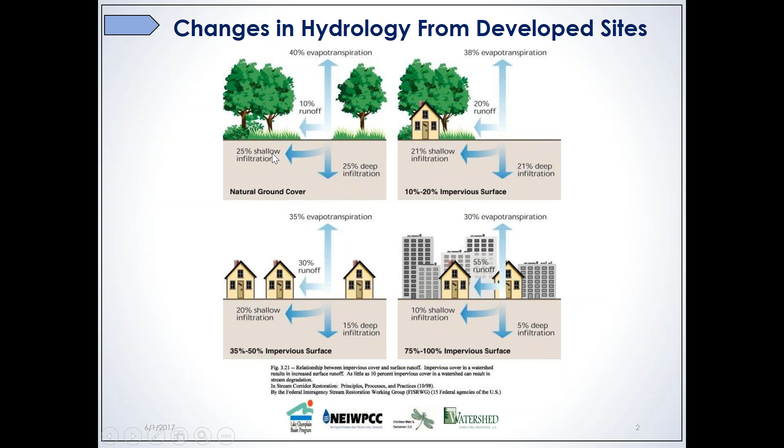The trick that we've always wrestled with in this field is, can we take a landscape like that and make it function hydrologically, probably more realistically like that? It'd be very difficult to get back to that, but that's kind of what we're talking about with green infrastructure.

The manual that we wrote for the Basin Program had an introduction that talked about what is green infrastructure, and here it's a synopsis of that definition. I highlighted a few things in there, of course, in green. The idea is to mimic natural hydrology—can we take a more developed landscape, lots of impervious cover, and make it function hydrologically more like a natural landscape? Pretty tricky, but that's the lofty objective of green infrastructure.

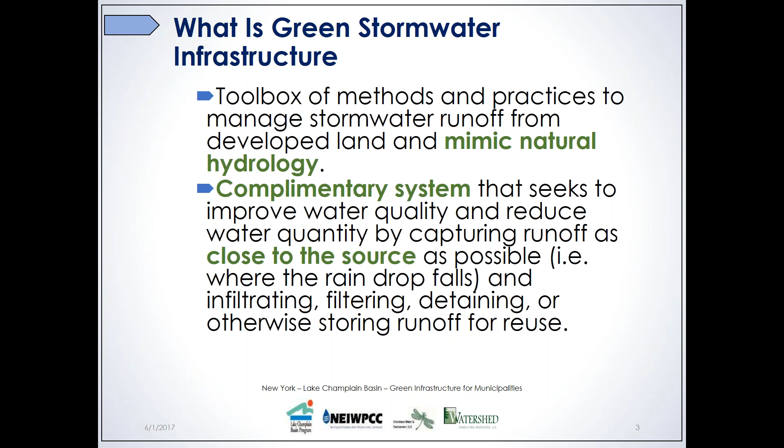And you can see the second bullet down there: it's really not a system that completely replaces what we call the gray infrastructure of curb inlets and pipes, because we realize in cities and villages that system's already in place and it's not going away. Perhaps with something like a new development project where you're starting from scratch with design, you could conceivably go total green. But in the context of this manual, which we'll talk about here in a little bit, we're thinking of it as a complementary system that works with the existing storm sewer system or the gray infrastructure, and that we are retrofitting in other types of green practices closer to the source of runoff. You can see the definition there. So that's kind of what we're talking about with this manual.

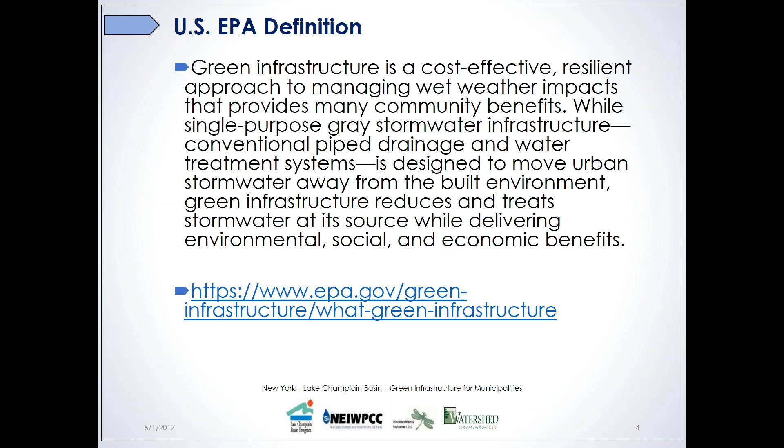This is EPA's definition, which is very similar in terms of working with the gray infrastructure and close to the source. If you're interested in EPA's take on green infrastructure, they have a whole web page you can see the link to. And of course, this webinar will be archived, so you will have access to all these slides as downloadable, I think on YouTube. Is that correct, Matt? Yes, that's right, we're going to post this recording on YouTube. Excellent, excellent, thank you.

That brings us to this concept of stormwater retrofits. So what is a stormwater retrofit? If we are going to put green infrastructure into a village street or a hardscape or a parking lot or a rural road or a building, how are we going to do that? Well, that involves trying to retrofit the existing system. It's putting in a stormwater management practice in a location where stormwater controls did not previously exist or were ineffective.

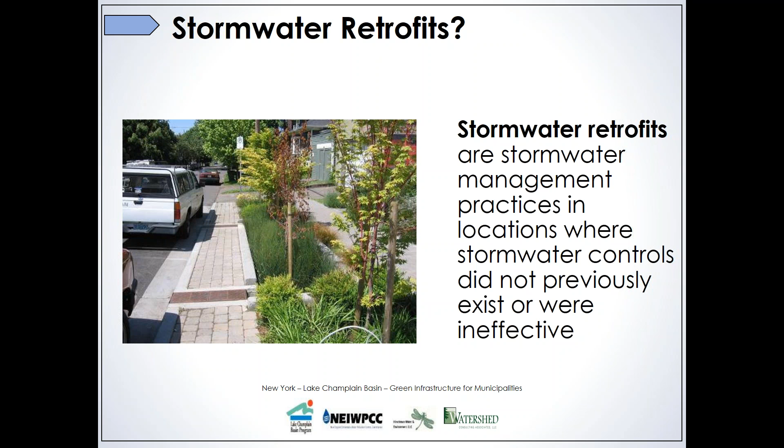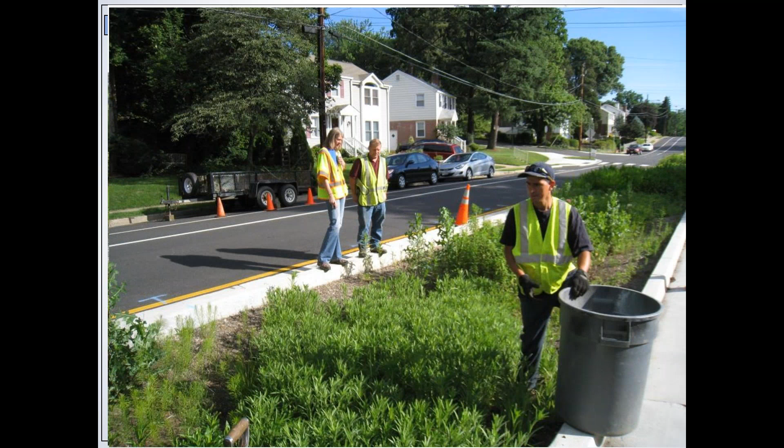This is another type of retrofit in the street system, and you can see here this median just used to be an asphalt median. It used to be impervious cover that contributed to the stormwater problem. So they retrofitted again. It's kind of sunken down with curb cuts so that the water from at least half the travel lane on both sides flows into the system. So that was another example of a retrofit.

And there's many, many different ways to do retrofits. You can use different materials, different plants, different types of structures. So this is an example from West Union, Iowa. The photo is credit of the Conservation Design Forum, which is in the Chicago area.

But this little town in Iowa had a terrible problem with flooding. Even a modest rain would flood the downtown. And they had an issue of redesigning the storm system, just making the pipes bigger. And the cost of that was just tremendous because they had to dig up the streets and put in all these pipes. So they decided to do it with permeable parking. And that really took care of the issue.

So basically they replaced the whole downtown area with permeable parking or permeable pavement. You can see here, and little rain gardens and biofilters also. So that was a retrofit on somewhat of a bigger scale than you usually see, but it worked very well.

Speaking of scale, there's a lot of watershed groups and groups like the Lake Champlain Basin Program and other groups in Vermont that are really promoting retrofits on the small scale, on individual parcels, individual properties, so that every individual lot can start contributing to cleaning up the water.

Here's a few other examples of residential scale retrofits with permeable pavement and rainwater harvesting, rain barrels.

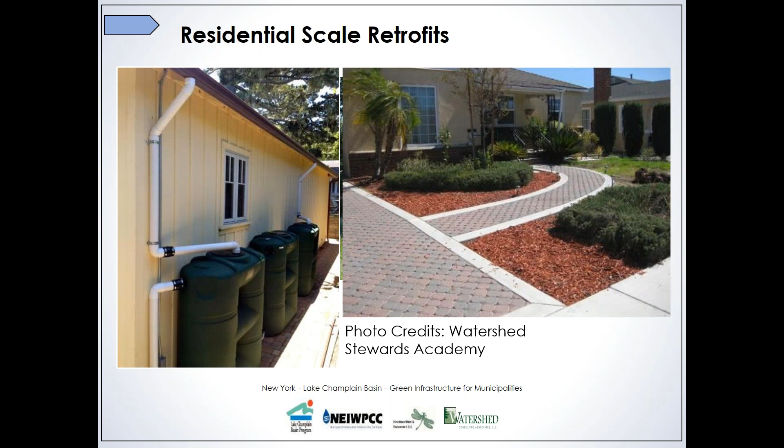So that's the context for the reason this manual came about. And it's targeted towards New York's Lake Champlain Basin. And the reason for that is because Vermont had similar things going on.

So what's the niche for this manual? Why is there yet another stormwater manual out here in the stormwater management world? And doesn't New York already have a stormwater management manual? And the answer to that, of course, is yes. New York DEC has their stormwater design manual.

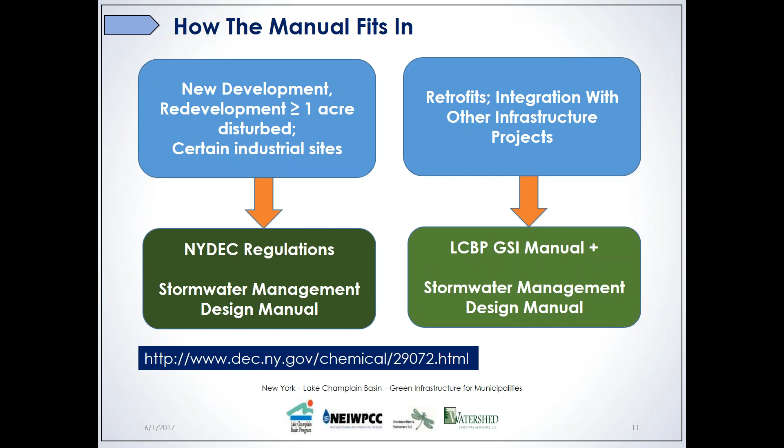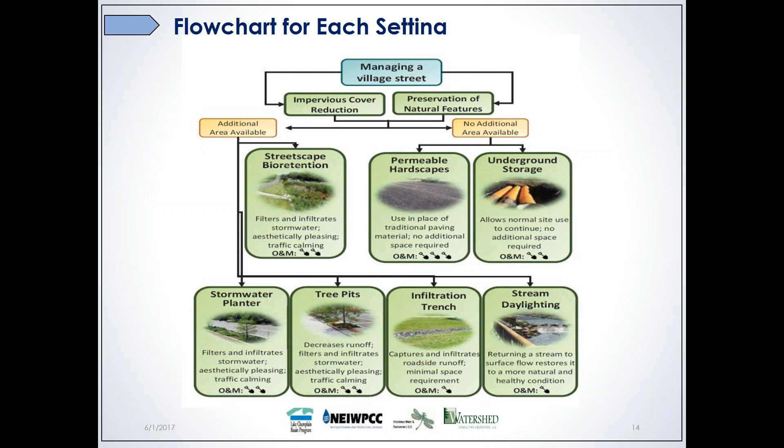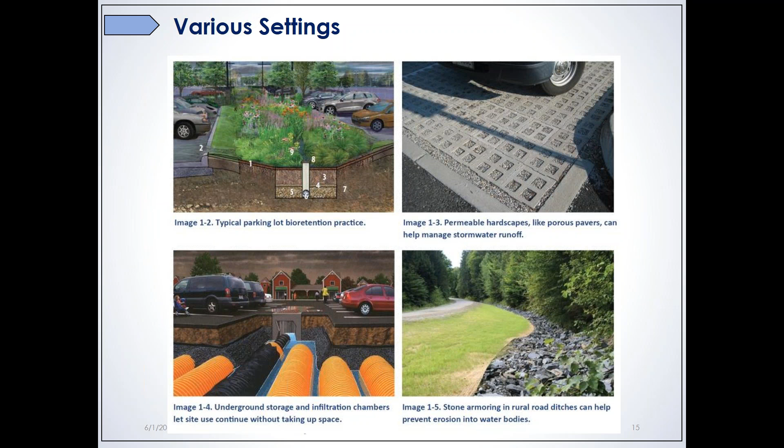Here's just a few examples of these different settings: a parking lot, which is a hardscape, going into bioretention, permeable hardscape here, underground storage for infiltration, and a treatment for a rural road that's causing erosion. So just a quick visual idea of what those 4 categories might look like.

Example, and these are all examples from the manual itself. The manual has an introduction to each of these 4 settings, as well as a bunch of case studies. It's quite impressive how many case studies from New York and Vermont there are in these 4 categories, and the manual breaks it down: what happened, what was there before.

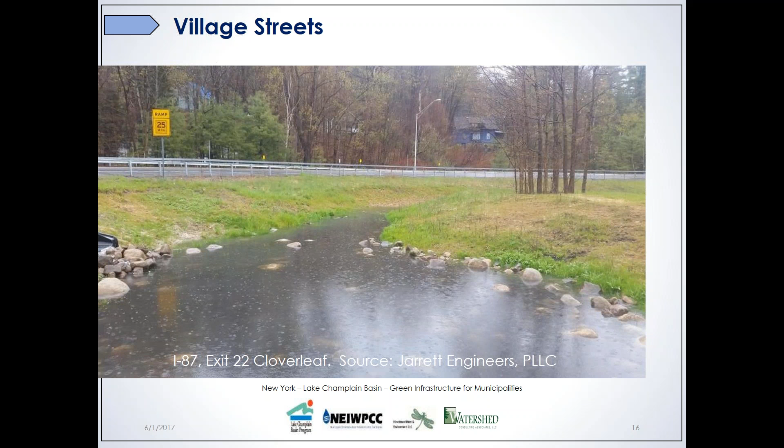This is one example from the Village Streets case study where they had some green space just sitting there next to the road, and that was the retrofit they did. That will probably be presented in the Village Streets webinar coming up June 8th, one week from today. If you're interested in Village Streets and these types of retrofits, and there's a lot more in there, I'd encourage you to download the manual and look at those case studies. You'll hear a bit more about that.

Next week's webinar, as well as all subsequent webinars, will feature guest speakers who have actually designed or managed these types of retrofits in these different settings. Here's another example of a Village Street retrofit, very simple, turning the water out into a dry well. This is from the town of Bolton. If it keeps raining and the dry well fills up, there's an overflow back into the drainage system. So you can see these are at different scales, different levels of sophistication, and we try to cover all that in the manual.

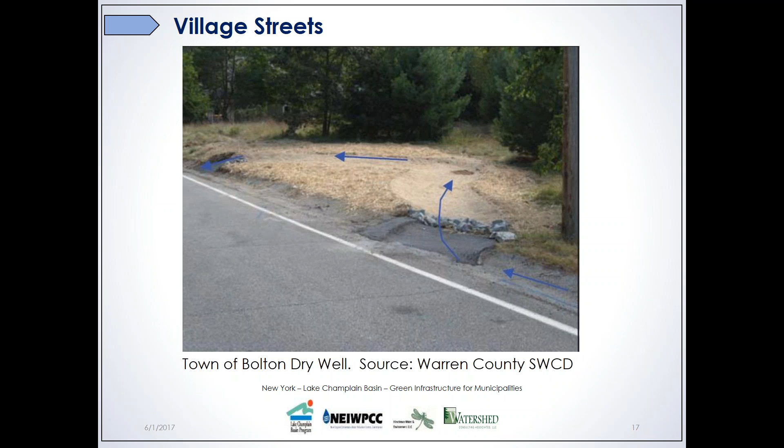That webinar is going to be on June 22nd. I think Dana is going to be leading the charge on that one, and there's more examples of that as well.

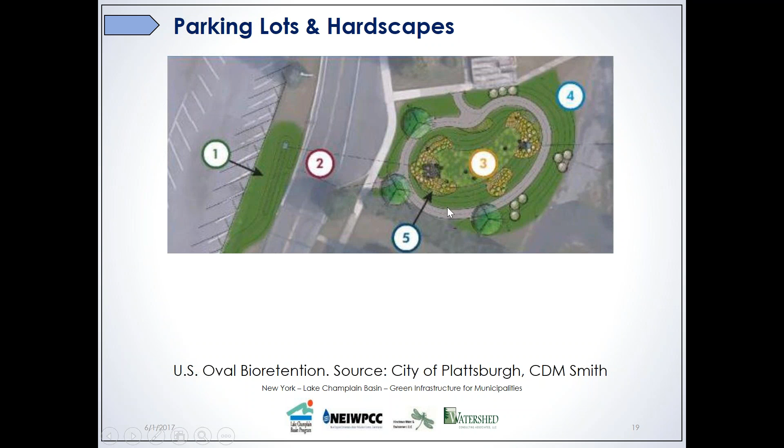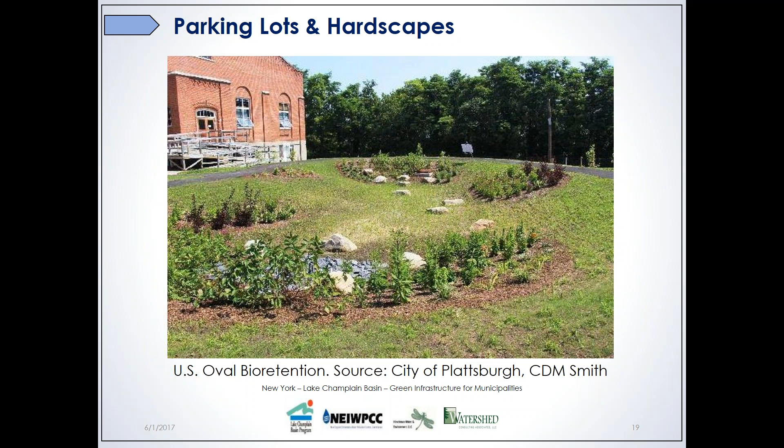The third category, parking lots and hardscapes. This is the U.S. Oval Bioretention Project in Plattsburgh, New York. You can see this parking lot and other areas, travelways of impervious cover. This was a retrofit where they put bioretention in the drainage system. They had the space available, and they're treating the water with that bioretention area. So that's an example of a retrofit for a hardscape parking lot or roadway.

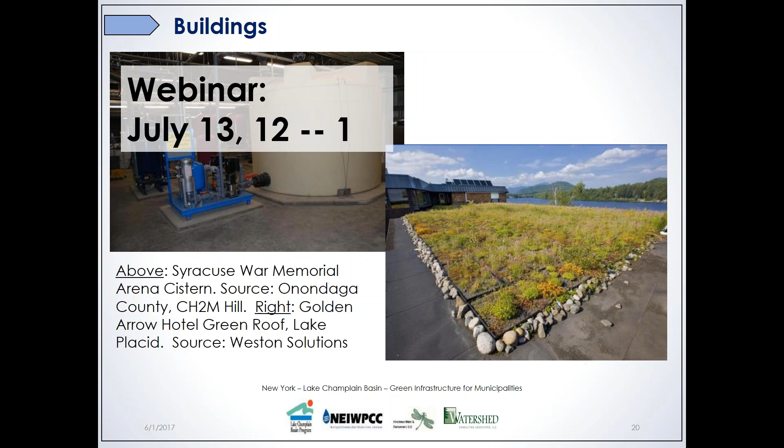This is the idea that we're going to integrate green into gray, integrating green stormwater infrastructure into the existing system in these four categories: buildings, parking and hardscapes, village streets, and rural roads. There's an idea afoot in the world of green infrastructure nationally that we should pursue what's called a dig once strategy.

We have infrastructure already out there—roadways, pipes, ditches, inlets, all the stuff that touches stormwater—and we've got to take care of it. Sometimes it needs to be upgraded, sometimes repaired. So the idea of dig once is: if you're going to touch some piece of infrastructure, put some green into it, something that will filter and treat for water quality. That's the essence of the dig once strategy.

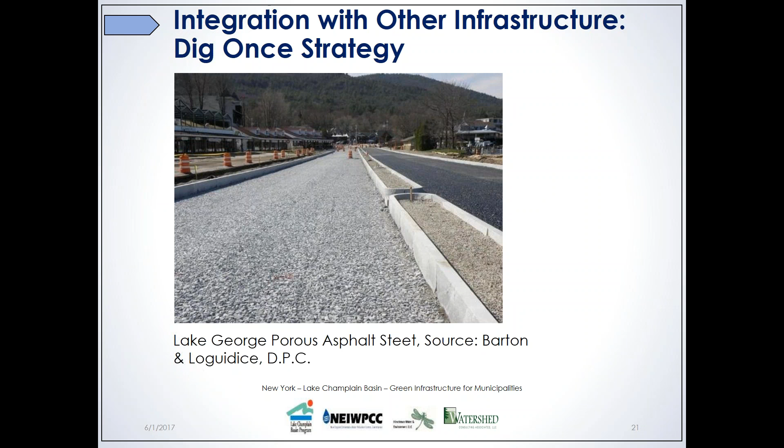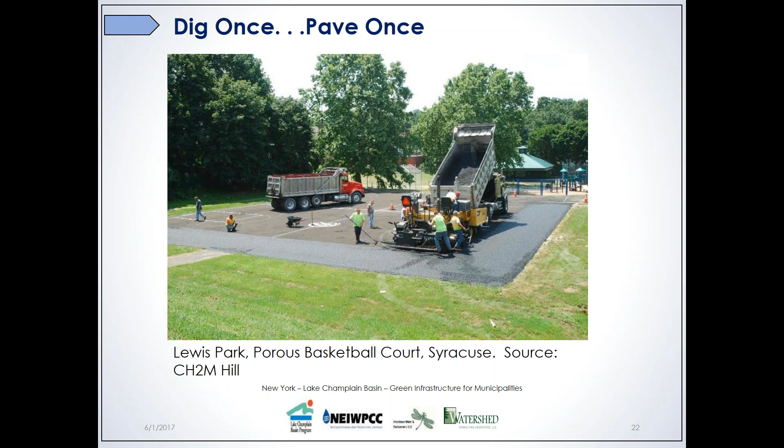This is an example, also shown in the manual, of this Lake George porous asphalt street. They were going to redo the street anyway, and dug a little bit more to make it porous—an example of a dig once effort. This is more of a pave once example from Syracuse, where they had a basketball court, and instead of just repaving it with regular asphalt, they made it a porous basketball court. So that's dig once, pave once.

The idea is basically you've got a procurement process, a lot going on with design, equipment mobilizing to the site, contractors—the goal is to not duplicate where you don't have to. If you can dig once, it has the promise of being cost effective, allowing you to share costs.

The green part might come from a grant or a different pot of funding, but if those things can be combined with your gray funding or O&M funding, then you might save some money, you might save some time, and it's worth pursuing because it might be a streamlined process.

Importantly, if you take on the ethic within a local community that every time you're going to touch a piece of gray, you're going to at least try to consider putting in some green, it probably won't happen 100% of the time, but if you have a process pretty early on where you ask what kind of green might fit into this gray...

Because we're going to be digging up the street, putting an addition on the school, redoing the park, adding to the library, all those different types of settings—if you think about it early enough, it might work out to stick in some green. So those are some of the advantages.

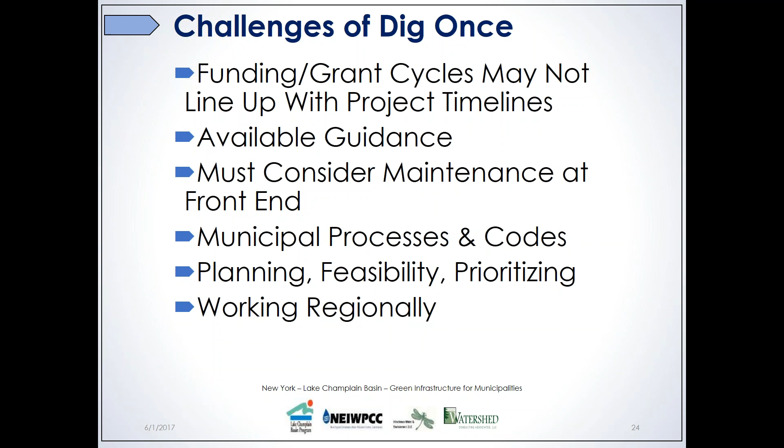That's an upfront step that should be done anytime you're thinking about putting some green infrastructure into the landscape. The idea is that we could work regionally—the Lake Champlain Basin program is a perfect setup for that, perhaps serving as a clearinghouse of lessons learned, ideas, webinars like this, funding for manuals, get-togethers, trainings, and things like that.

A lot of these challenges were articulated down here in the Chesapeake Bay watershed, where I'm a resident. There was a workshop last year—actually earlier this year—and the report was done earlier this year. The workshop brought together people from all over the watershed representing government agencies, design professionals, local government, MS4 people, and funders, in a big brainstorming session on this Dig Once strategy, and some of these challenges I just talked about came out of that.

There's a report, and if anybody's interested I can send it to Matt and the Lake Champlain group, and maybe they could put it on the website. That report goes into quite a bit of detail about the challenges and also some of the ways to address those challenges with this idea of Dig Once.

So that's all to say there's a chapter in the Lake Champlain Green Infrastructure Manual just on this topic of planning and implementation. Chapter 6 touches on a bunch of the stuff I've been talking about—what are the prerequisites for even mounting the effort to put some green infrastructure in your community?

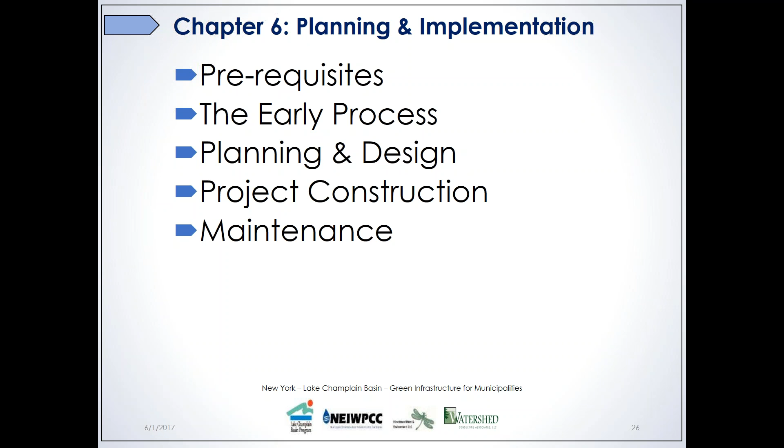What should you consider early on in the process—not at design, not at installation, and certainly not at maintenance, but early on when you're just thinking about the ideas? Key considerations include planning and design, project construction, and maintenance. That Chapter 6 in the manual addresses all those things.

Here's a quiz - people can type their response in the chat box. What's the most important part of stormwater planning? A, the free barbecue at the stakeholder meetings. B, estimating load or volume reductions. C, getting out in the field to identify sources and solutions. D, building implementation support from the beginning. Or E, documenting findings.

That's Dana's got it - I don't know what the equivalent would be in New York. There's probably a kielbasa or something like that. You've got to feed the folks, but I think the real answer is all of the above, though B through E might be a little more important than the barbecue. Yep, got the maple - of course, maple.

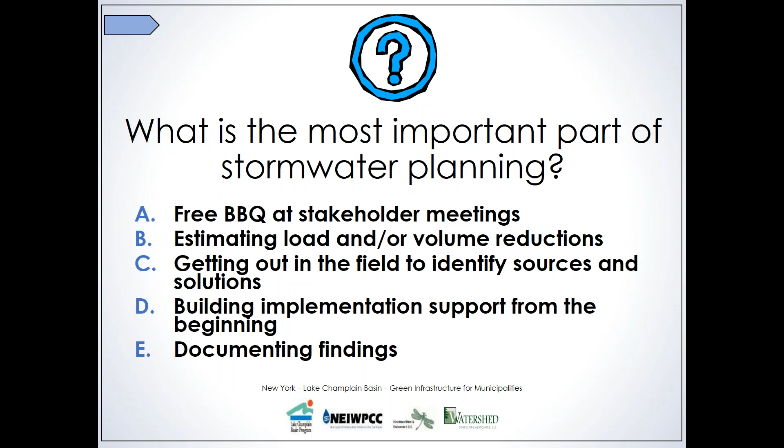Here's a couple visual examples of the barriers or challenges in the process of integrating green infrastructure. As you can see, we all have codes - every village, town, and city has some code that talks about street width and whether you need curb and gutter. These codes can make green infrastructure hard to do. If you have to have curb and gutter, or a 36 or 50 foot wide right of way, those are impediments that should be identified through a planning process, and maybe a structured process to remove them from local codes.

My former employer, the Center for Watershed Protection, has a tried and true method called better site design and local roundtables, which have done just that. I think the CWP webpage has tons of material on the better site design process.

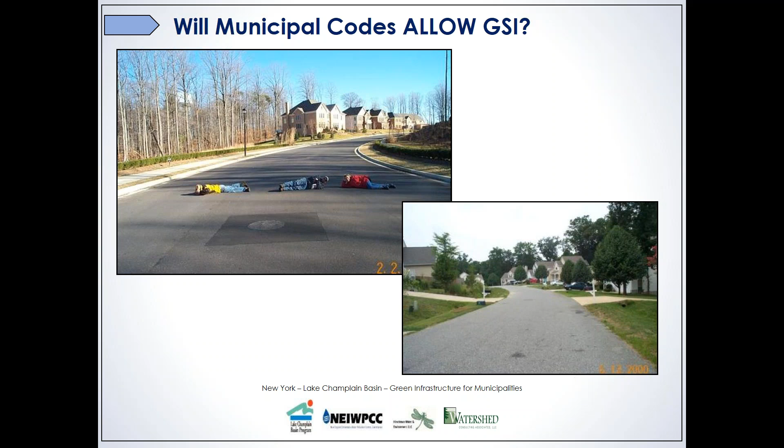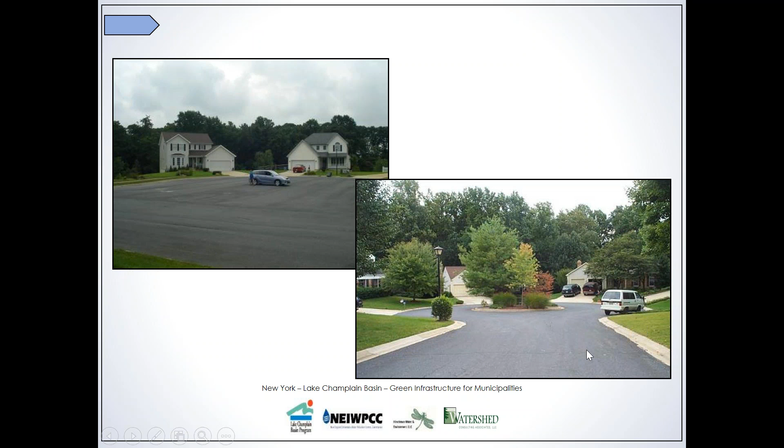Here's another example - a cul-de-sac. Obviously up here you've got a huge cul-de-sac - basically a lot of this may be driven by needing to pull in 3 fire trucks at once, if every house in the cul-de-sac were on fire at the same time. But as you can see, other solutions might be possible where you can put some green in. So that might be a code issue at any local government.

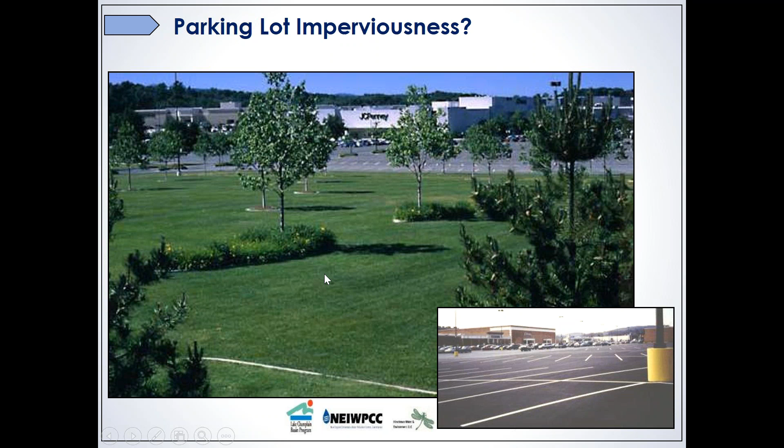Parking lot imperviousness - this shows overflow parking on reinforced grass, one of those products with rings or a superstructure that allows people to park on it. This kind of parking lot is designed for something like Christmas Eve overflow, and it could be green, but it has to be allowed in the code. So that's kind of what we're talking about.

Identify and prioritize your projects and promote the co-benefits. In that Chesapeake Bay workshop I referred to, we talked a lot about co-benefits. For this reason, if you're an elected official, a citizen, a business, or a civic organization, talking about infrastructure or green stormwater management can be an eye-glazing entry into why the community should undertake anything.

It's pretty technocratic, but people like their clean drinking water. They may be very concerned about drainage or flooding issues in their neighborhood. They might be concerned about whether there are enough trees, whether the community is healthy, whether people are out walking, whether there are paths along creeks, recreation opportunities, green jobs and economic development, or a way to invest in challenged neighborhoods, et cetera.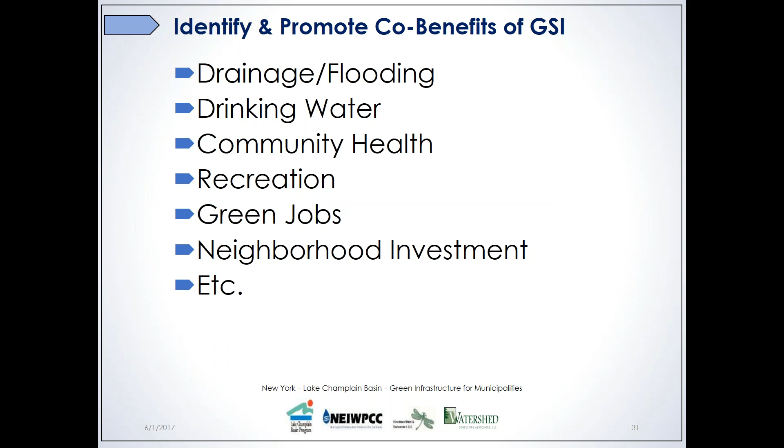So whenever you're talking about green stormwater infrastructure, don't lead off just talking about GSI this and GSI that. You want to see what's really of importance to people in that community and weave green infrastructure in, because it has benefits in all these different categories. It's really about messaging.

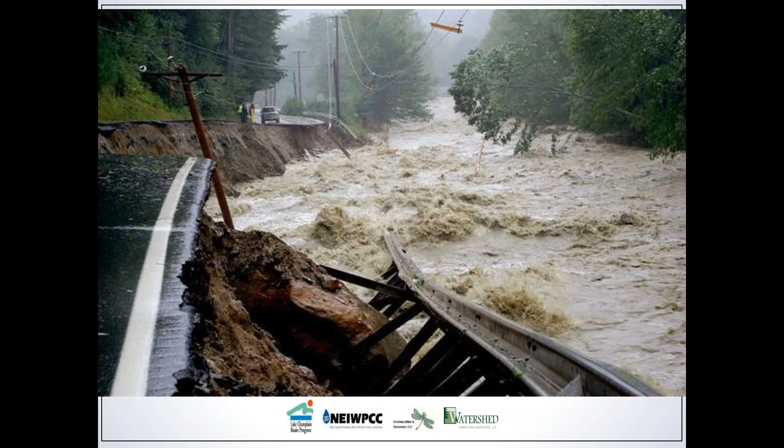Here are a few examples of recreation, fisheries, and people losing land to erosion. Obviously, green stormwater infrastructure or any type of infrastructure isn't going to do much in this type of flooding situation. But there is evidence that over long periods of time, if you do enough green, you can reduce at least a nuisance level of flooding.

We had a slide on the importance of prioritizing, and that can't be stressed enough. People can go in the field and say, let's stick something here, let's stick something there - that seems like a good idea, and we'll just green the world - and that might be $7 million later. You can't do it all, you can't do every project that seems like a good idea. So there has to be a systematic way to score, rank, and prioritize your projects, and you might pick different ways to do that. This is just an example.

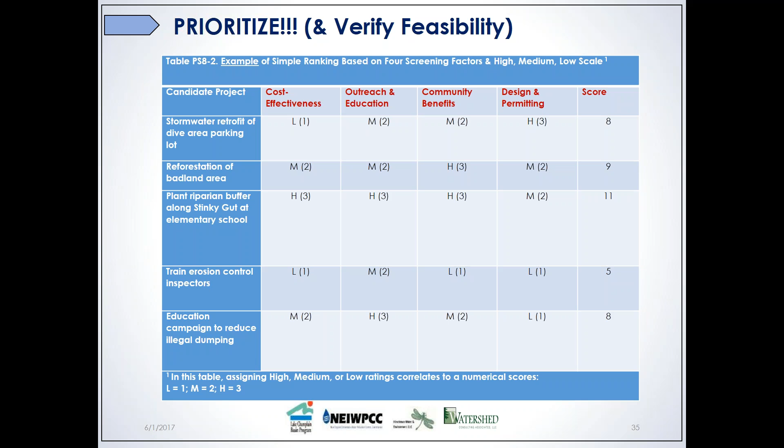The point is, look at your suite of projects that you've identified through some type of inventory process in your community, score, rank, and prioritize them, and check in with the community and stakeholders about what they consider to be priority projects. That is worth doing. Unfortunately, it's a process—it takes time, staff, and resources. There are many examples across the country where green infrastructure projects skipped this early step and had problems later on. That's why we're stressing the importance of this process.

Everybody wants to know about cost. We have all these great ideas of green infrastructure—how much is it going to cost? Is it cost effective? Information is available out there on the websites of many different organizations, including Center for Watershed Protection, WEF and WERF, and state agencies. It's really hard to pin down costs.

The idea is at the planning stage, you're probably going to use literature values, some of these existing resources for the different costs and cost effectiveness. This is one that Center for Watershed Protection did fairly recently for the city of Richmond, in Virginia—total nitrogen cost effectiveness, total phosphorus, total suspended solids—and you can see it looks at a lot of different types of projects.

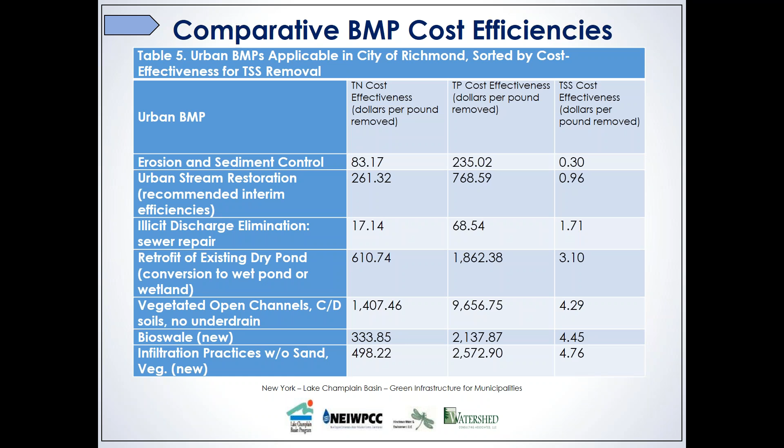So literature values are available. I wouldn't rely on these when you actually get to your design process because there are so many variables when you get to the project-specific technicalities that the cost really has to be looked at. You have to sharpen the pencil at that stage. But cost is always going to be the first thing that the city councilor, council person, or public works director is going to ask about.

Now, we want to put numbers on everything. This is a great quote from Albert Einstein: not everything that can be counted counts, and not everything that counts can be counted. It's really hard to quantify the benefits of a pet waste program or a riparian restoration if we're trying to bring everything down to dollars per pound of nitrogen reduced, or an illicit discharge program, or education.

Cost is important, but you have to put it in context, and that's why these other screening factors—like community benefits and opportunities for education and outreach—are good to throw into your ranking and prioritization, so you can fold in these other types of projects and not have them discarded just because they're hard to quantify.

Another planning step, very important: the work up front with utilities—dry utilities as well as wet utilities—and feasibility. A lot of things can be put on paper, but unless you know that they are feasible—are the soils adequate, has the geotechnical work been done, what about existing trees, tree canopy, root zones, can the project be accessed by equipment—that might have to do with traffic control.

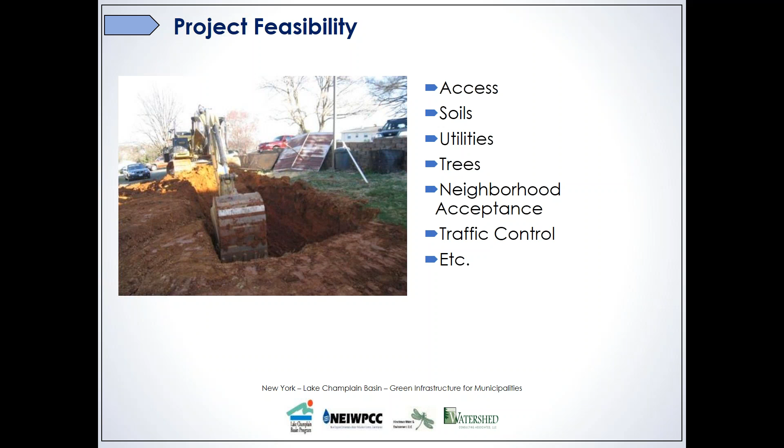Again, the lesson from across the country: it's easy to skip this because it takes time and extra money, but it has led to problems down the road. So just to give you some sense of what's been important in other places.

Finally, maintenance—how can we forget about that? Whenever a project is even conceived, you have to ask who's responsible, who's going to maintain it. Do they have adequate training, or in some cases certification? Do they have the adequate tools to maintain it? Is there access? What would be the frequency? If there's vegetation, how's that supposed to be maintained?

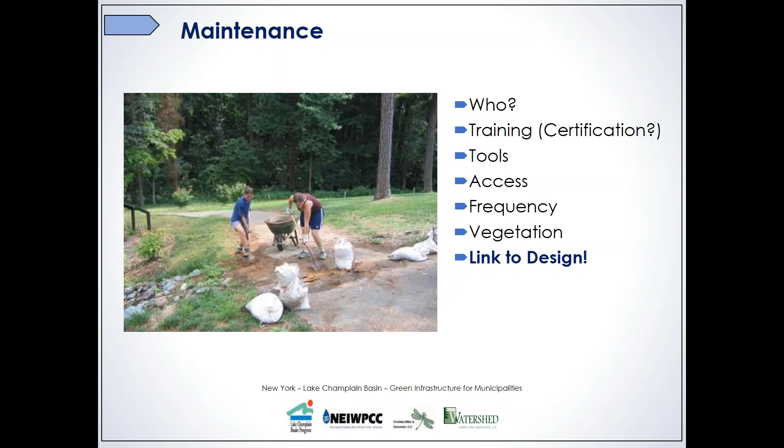Very importantly, can we modify the design to reduce the long-term maintenance burden or maintenance liability of a practice? One of the things I do down here in the Chesapeake Bay is teach a certification class for landscape professionals called the Chesapeake Bay Landscape Professional Certification, and we talk a lot about this link between design and long-term maintenance responsibility. So there are people around the country thinking about it.

I think Seattle, Pacific Northwest, some places in the Southeast and the Midwest, and obviously up in your neck of the woods too, in New York and Vermont.

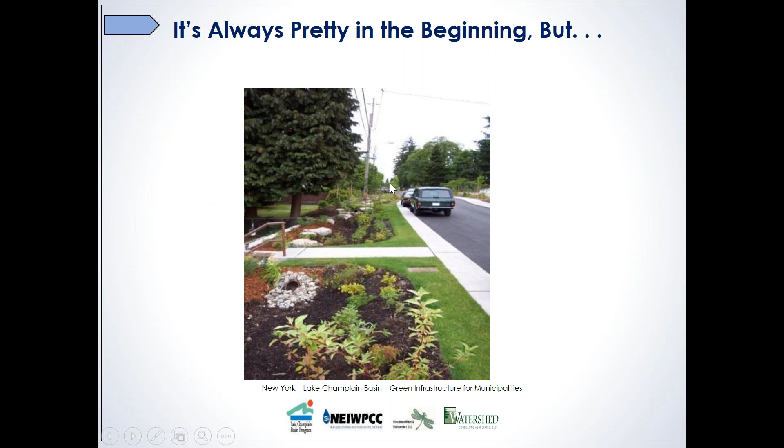The idea with vegetated practices, the internet is full of beautiful pictures. They're usually taken right after a practice is installed and the landscaping goes in, and it looks kind of neat and orderly, with these nice mowed edges. Over time, these things become jungles and thickets, and people start scratching their heads, thinking, I didn't know this thing even had to be maintained, and now I have no idea how to maintain it. So that's the situation we want to avoid by asking all the right questions during the design process.

Here's one in the right-of-way. If this turned into a thicket, we'd have sight distance issues, safety issues, neighborhood acceptance issues. So you can't put in something like this without a maintenance plan, obviously, since it's in such a public place with traffic flow, just by way of example.

Good news for you, New York folks. Your Department of Environmental Conservation has just released this maintenance guidance. This is a chapter in the state stormwater design manual, and it just came out on March 31st. I worked on this project when I was with the Center for Watershed Protection with some colleagues there, including Laurel Williamson and Deb Caraco, who's in the Ithaca area. This maintenance guide is interesting — it's a different approach. I think New York's approach to maintenance is very unique, as documented in this.

What they've put forward here is this maintenance hierarchy, where most of the maintenance tasks or inspections and maintenance should be done at this level 1, which is the property owner or property manager. If it's a matter of mowing, picking up trash, taking care of vegetation, that's kind of a level 1, and they want to really mobilize these BMP owners or managers to take care of that stuff. You can't really expect state or municipal staff to take care of a lot of those routine maintenance tasks, so there's checklists and guidance for how you do that if you're level 1.

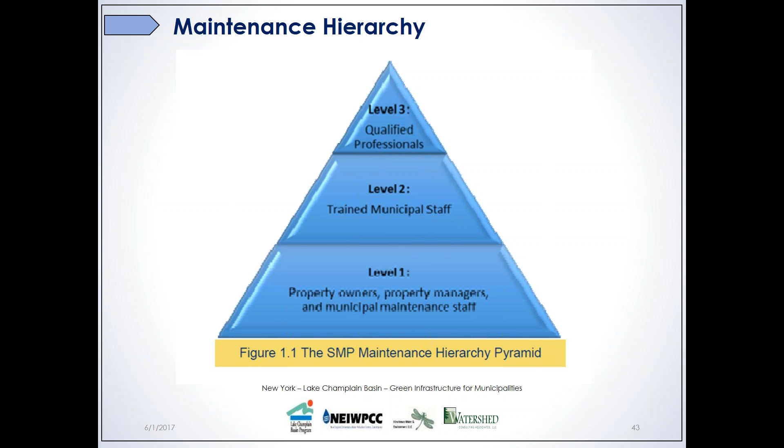Going up the pyramid, if you're level 2, your level 1 people might say, I got a problem here, I really don't know how to take care of it. There's some kind of structural issue, there's erosion, the practice doesn't seem to be getting any water, or it's holding water too long. Those types of issues get bumped up here to level 2, where a trained municipal staff person would take a look at it and do some diagnostics — why is this problem happening, what are the practical solutions? And if these folks at level 2 get stumped, or the issue is more serious, it can get bumped up to this qualified level 3 professional, somebody with more training who can really go out there, diagnose, and fix the problem. So that's the hierarchy approach that's in the New York DEC O&M chapter.

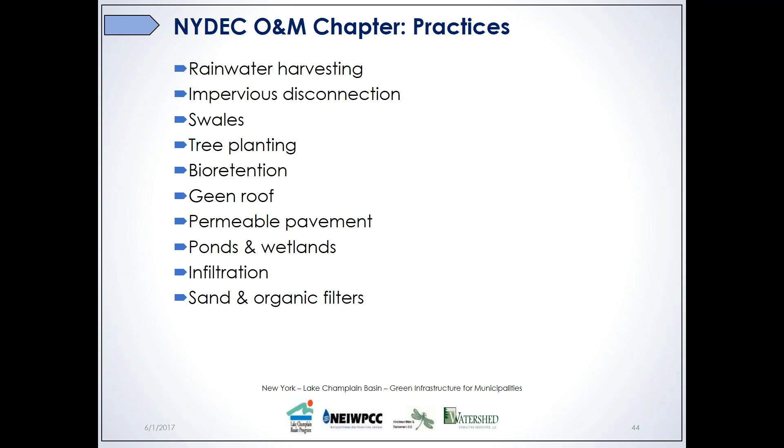The Lake Champlain chapter has some similar information, but it's really based on what's in this New York O&M chapter from the Stormwater Design Manual. The New York chapter has O&M checklists and guidance for all these different practices shown here. I won't read them off, but you can see it's a lot of the green stuff, because we don't really have a track record of maintaining things for a long period of time. So this is where the guidance is really needed.

Here's an example of one of the checklists — this is a level 1 visual checklist, and for every problem, like bare soil and erosion or rills or washing of dirt, there's a picture of what that looks like, some actions that can be taken, and here's where you have your kick-out. So if the person doing the level 1 inspection says, yeah, that's me, I'm kicking this out to level 2, that would be a sign to get the municipal inspector involved. So that's an example of the checklist.

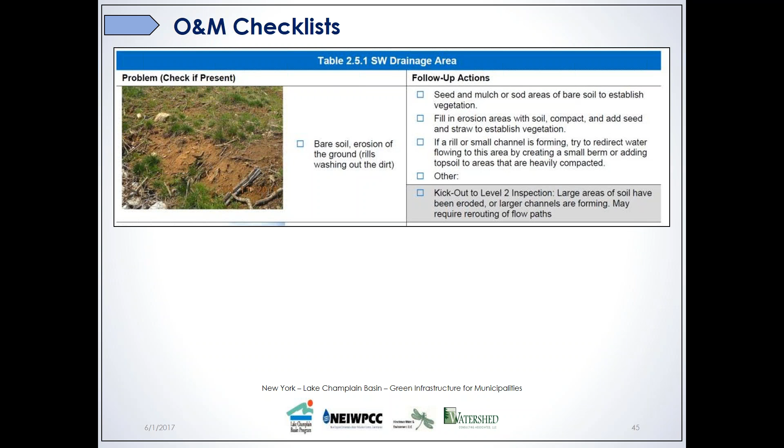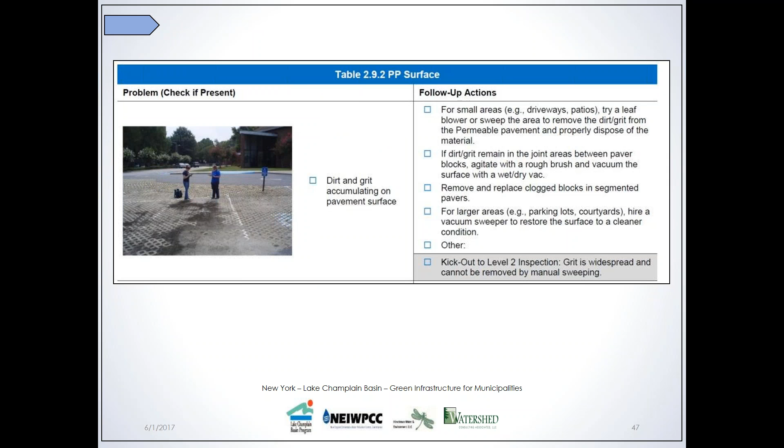Oops, I think I might have just messed myself up on advancing the slides. Oh, here we go.

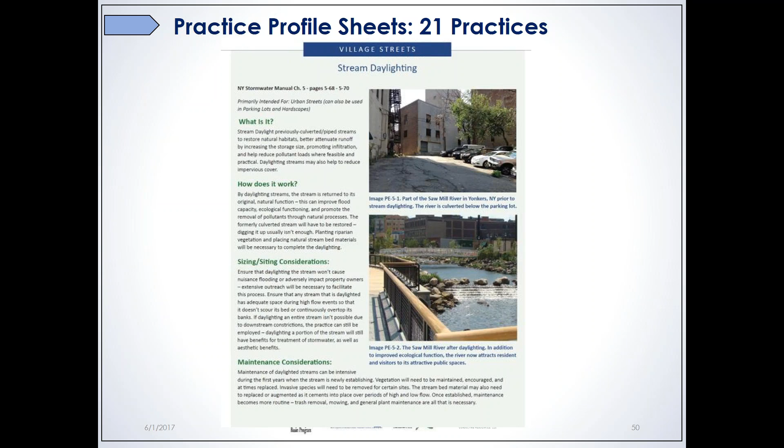All right, Dana, do you want to click in here and go through these funding slides quickly? Yeah, why don't we just continue sharing your screen and I'll just talk you through it. Yeah, that'd probably be the easiest transition.

We took a pretty quick look at the funding sources in New York. Luckily, New York DEC and Ryan Waldron specifically have done a lot of work putting together these funding sources. So we did a selection of the funding sources available out there. Anything specific to the Lake Champlain Basin region, we listed those out in Chapter 8. So Dave, why don't you go ahead?

Essentially, we wanted to keep this pretty quick and easy. We didn't want to get into the weeds on a lot of details. So we broke those funding sources down into a table, subdivided into New York-specific funding sources and federal sources primarily. That table contains the grant program, the funding source, the program's relationship to green infrastructure implementation, and the type of funding - whether it's for planning, initial scoping like a master plan or retrofit analysis, a pilot project to accomplish in your town and implement elsewhere, or just implementation where the scoping is done and you're ready to build something, which is the best part of green infrastructure in many ways - actually getting to do it. So it breaks it down to that. Many overlap, many will be for both planning and implementation.